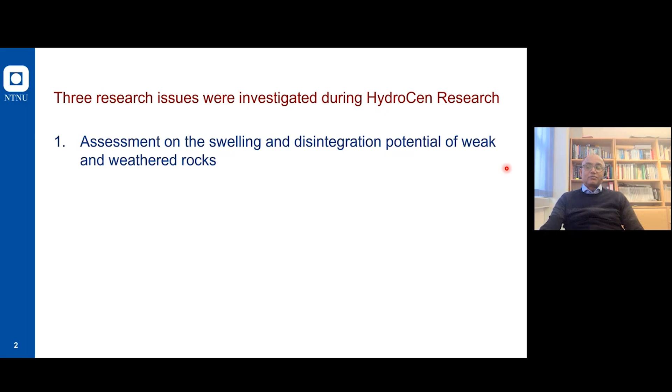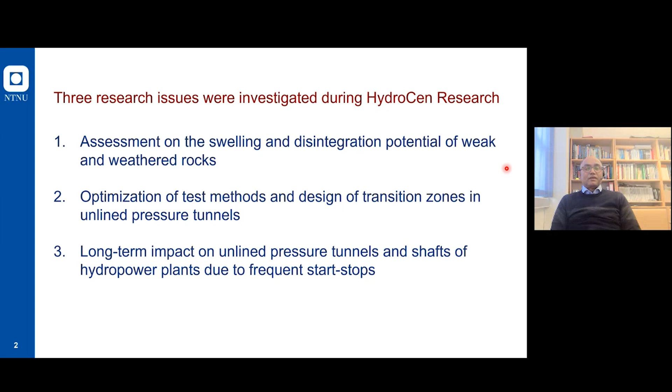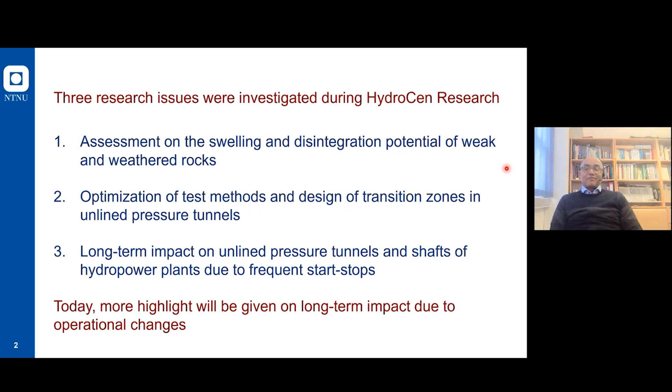The second one was optimization of test methods and design of transition zones in unlined pressure tunnels. And the third one was the long-term impact on unlined pressure tunnels and shafts of hydropower plants due to frequent start-stop. So this is the issue that I'm going to discuss today. The other 2 issues can be discussed sometime later, maybe in future.

So first I will discuss the background on why operational changes happened in Norway. Until 1991, we had almost constant operational scenarios in Norwegian hydropower plants because there were annual agreements with local communities and industry on how much energy they need all the time. That was a fixed operational system, so there were not that many start-stop sequences in a year period. There were very few.

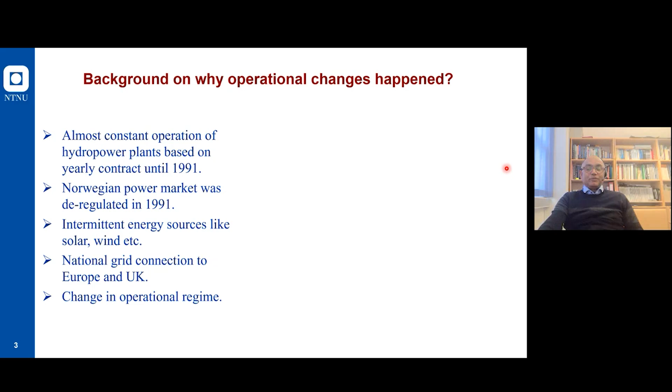In 1991, Norway decided to deregulate its power market, and that led to changes in the operational scenario. In the meantime, after 2000, intermittent energy sources like solar and wind have especially been expanded. And also the Norwegian national grid connection to Europe and the UK has now been made. So that makes a change in the operational regime.

If we look at this pie diagram, we can see the different types of energy systems that are applicable in the European market. Hydropower covers almost 11%. This scenario is predicted for 2050 by Statkraft. So it means there will be a huge change in the energy market in Europe.

So the main battery system to balance this market is most likely hydropower, because it has the potential to store water in the reservoir as a battery, and then it can be used when the price and demand are high. In that context, Norway, a country that has almost 50% of the reservoir capacity of Europe, has quite a lot of impacts on it.

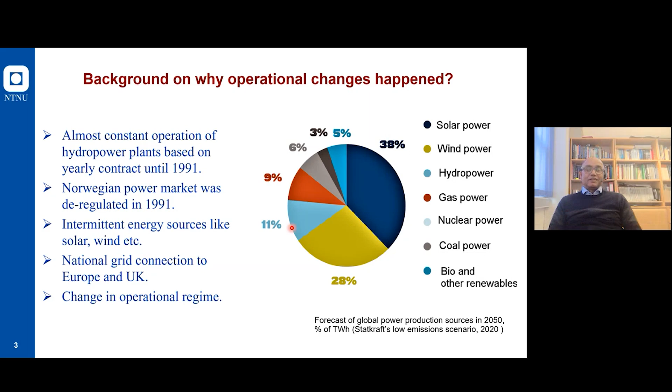As a result, we have collected from some 10 different hydropower plants how the operational regime is right now. You can see here every year we have start-stop or operational change scenarios of up to almost 850 maximum, and minimum up to 100 times. So this is very dramatic, and this will increase more and more.

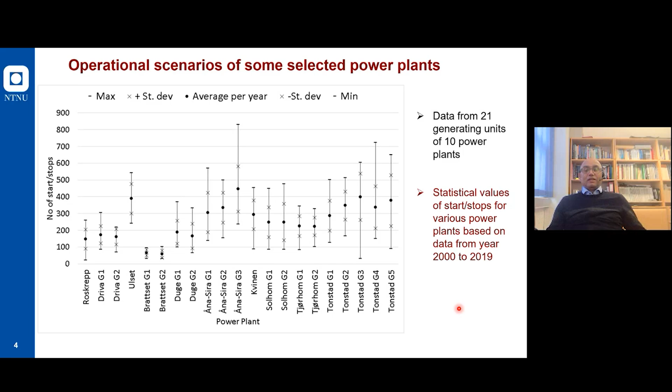These changes will have impact not only along the waterway system itself and on the turbine and generator, but also on the tunnel wall, on the rock mass outside the tunnel. How it happens, I will show you.

If we look at an operational situation of start-stop, for example, we have an off situation, an on situation, and again an off situation, and we may also have load changes. So we start the plant, come to the maximum operational point, then reduce slightly, again reduce slightly, and then do the stop. This is the typical scenario nowadays in Norwegian hydropower plants.

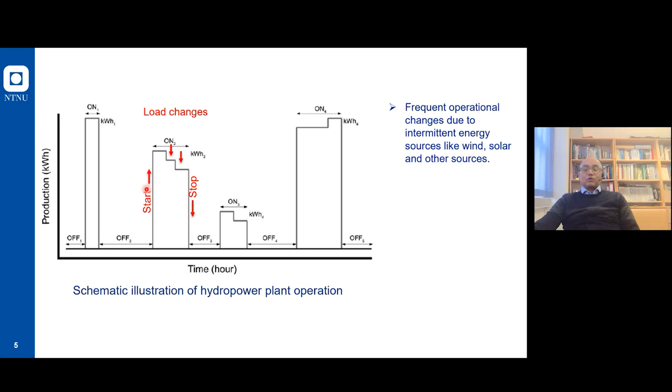These operational changes vary from 20 to over 800 times a year, with a typical mean of about 350 times per year based on this study of 10 hydropower plants. But there are many other plants that are operated even more dramatically. This causes variation in pore water pressure in the rock mass, because Norwegian waterway systems are unlined. It means the water has direct contact with the rock wall.

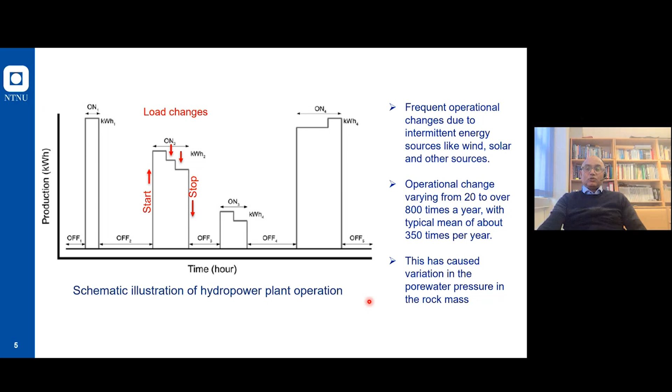In the rock wall or rock mass, there are different joint systems from where water penetrates into the rock mass, so that will change the pressure balance between the water in the tunnel and in the rock mass. To study that, we have made instrumentation. For example, I'll show the damage that may take place due to these changes.

So these are the main scenarios that are happening in tunnels. And of course, many of these tunnels are not stopped. Still, they can be operated, but there will be some more hydraulic loss, and then over time the accumulation will increase more and more. So this needs to be somehow balanced. What to do and how to operate our hydropower plants is very important to make a strategy for.

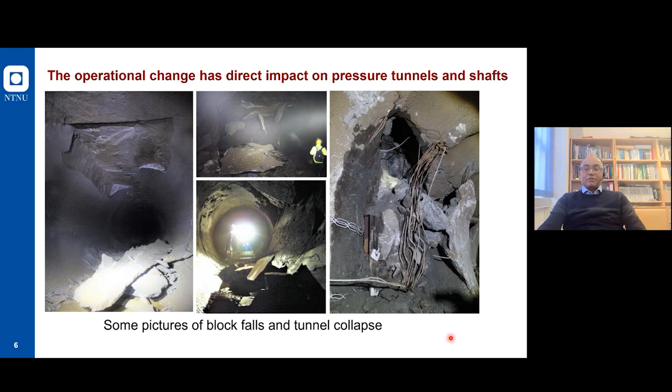So why it happens is that we have a design principle of the tunnel systems or underground plants for hydropower that is governed by 3 main criteria. That is, the vertical height from the exposed rock to the position of the tunnel, somewhere here, should always be more than water pressure divided by the density of rock multiplied by cos alpha, which is the inclination of this tunnel or shaft.

And another criterion is that the shortest distance from the topography to the tunnel should be more than water pressure divided by the cos angle of inclination of this valley and the density of rock. And the third criterion is that the minor principal stress in the rock mass must always be more than water pressure. So most of our hydropower plants fulfill these criteria.

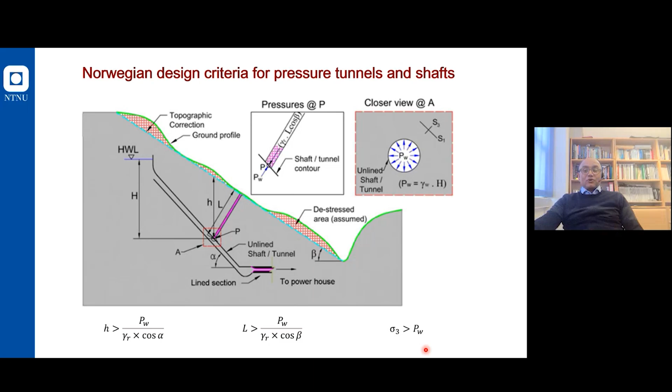But these criteria are to ascertain that the water is not leaking out of the tunnel, but when it comes to the failure inside the tunnel, then this is a different story. So therefore, why these things are happening is very important to study, of course. And that was the main interest for the hydropower industry, and then they asked us to do this research.

And if we look at this design concept using 3 criteria, then there has been the use of a safety factor of 1.3 during the normal period, and if there is an upsurge condition, it may go down to 1.1. But as you see, this is a tunnel which is pressurized with water. And then there are joints in different directions in the rock mass, and water flows through these joints.

And then the normal stress perpendicular to this joint must be more than the water pressure. That will of course hinder leakage far away, but near the tunnel the water pressure is still fluctuating, water penetrates here, and these joints will change due to operational variation. For example, if we have a sudden stop of the tunnel, then there will be a water hammer along the tunnel wall, and that will also affect the rock mass and penetrate into the rock mass.

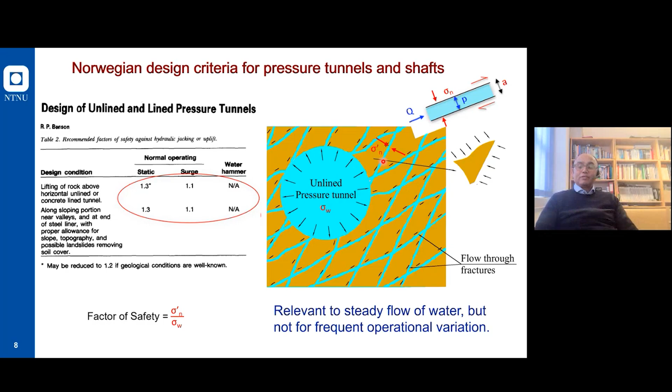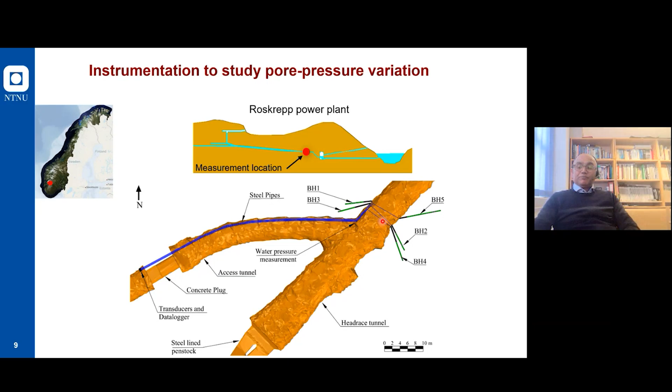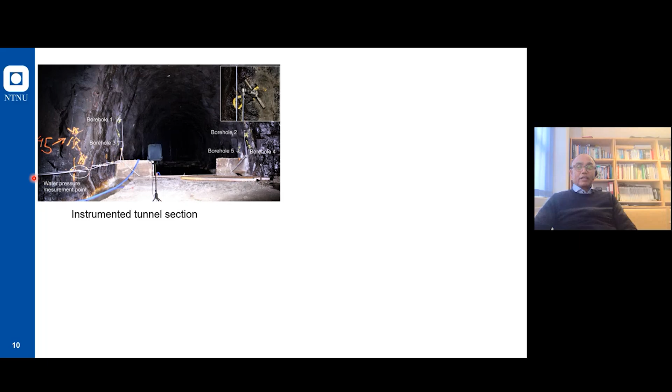So we did pore pressure variation measurement in these 5 different holes and in the tunnel itself, to see how it impacts the tunnel and how the rock mass and the tunnel interact with each other. So to do that, we made instrumentation here. You see there are some pipes coming from both walls out to the tunnel. And then there are these plugs. Through the plug, the pipes are taken down, sensors are kept here, and pressure is monitored in this box, which is a data logger.

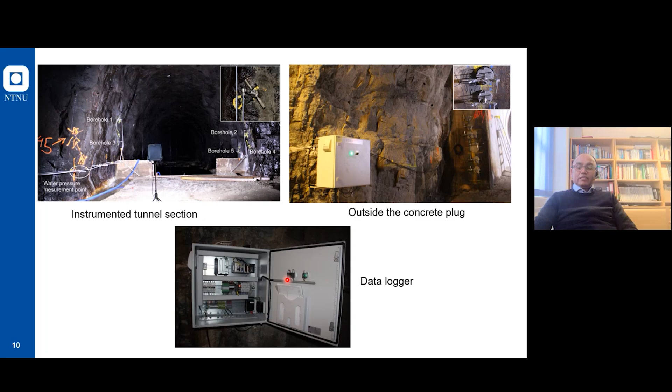It logs at least one data point every 10 seconds. There are millions of data points available from this Roskrepp power plant. Studying this data, we have found very interesting results. But before I go to that, let's look at this situation. For example, here there is constant water flowing in the power plant with a steady flow, and suddenly when we make a stop, there will be a water hammer, and then the water hammer calms down and converts to long-term oscillation, right?

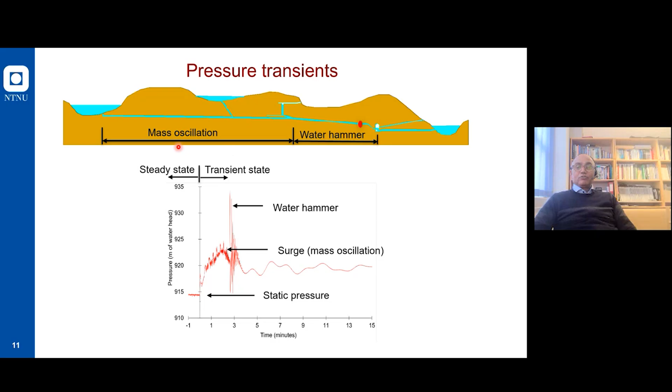So this dramatic increase in pressure and then long-term oscillation will have a huge impact on the rock mass. It means the oscillation goes from the surge tank upward, and the water hammer is effective in this area if the surge tank functions very well. But that water hammer is also converted to mass oscillation after it ceases.

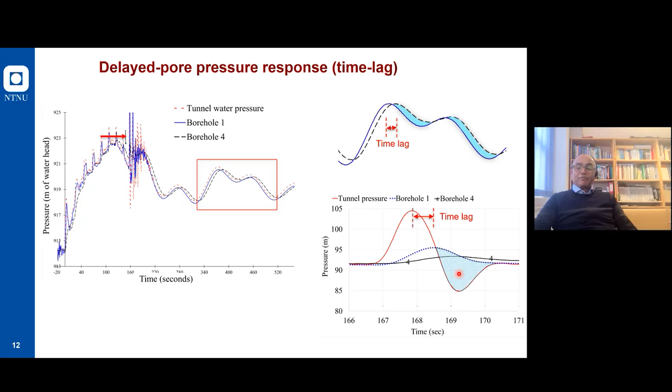So then there is an accumulation of additional stress here. That stress, even though it is on a very small scale, not in megapascal, it's in kilopascal, millions or billions of times of these changes will have an impact on the rock mass. And also this water hammer is even more dramatic because it will also cause a huge pressure change in the rock mass. So that will create a kind of hydraulic stress. This hydraulic stress, which we give the terminology hydraulic impact, will have an impact on our tunnel, pressure tunnel and shaft systems.

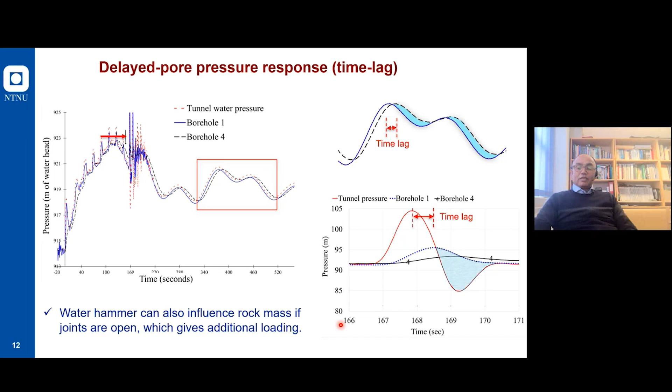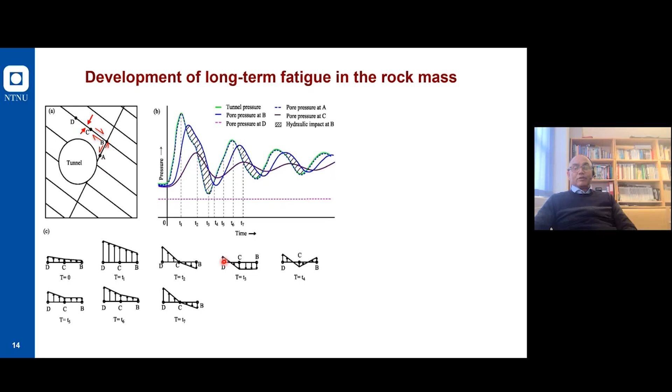For example, when we are at the beginning phase of start or stop of the tunnel, the pressure distribution will be like this, almost similar in all points. And once we are at time t1, the pressure will be increased in D and slightly less in B. And if we reach time 2, then there will be negative pressure in one area and positive pressure in another area. And if we go to time 3, then even more negative pressure here. So in that way, there will be an imbalance in the pressure development.

So the pressure transients will lead to long-term fatigue, because the same rock block will experience different scenarios over time. So that leads to the development of new cracks somewhere here, which is the fatigue crack. So that needs to be investigated in even more detail.

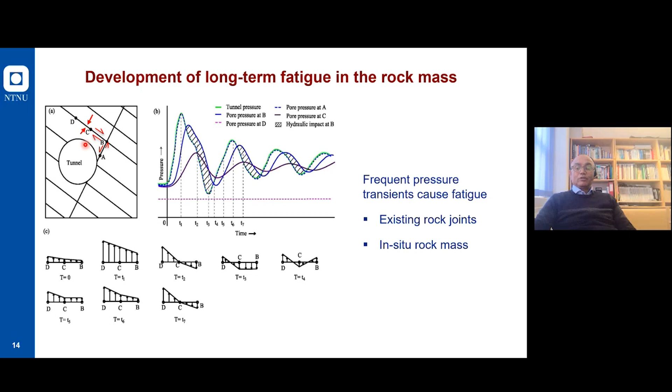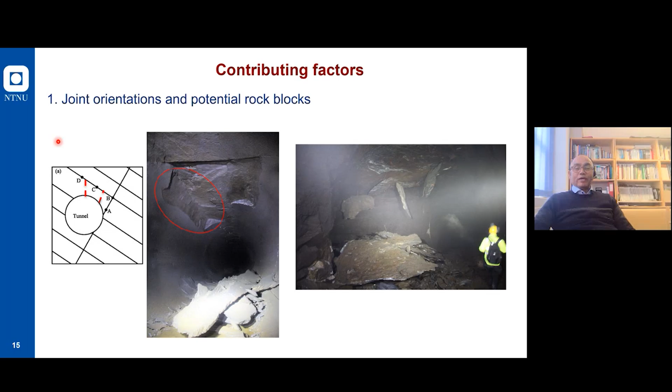So another contributing factor is the deformational response of the rock mass. For example, hard rocks like granite, quartzite, granitic gneiss, and many other hard rocks are much stiffer, and the joints need much higher fatigue limits. They have higher fatigue limits, meaning it takes a little more time for the block fall to occur.

However, if we have rocks that are more deformable in nature, or a weak rock mass, then the stiffness of these rocks is less, meaning the E modulus is much less. So then they are unable to tolerate a larger number of pressure transients.

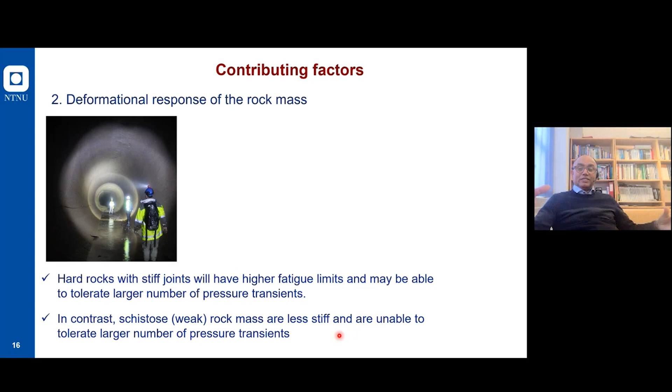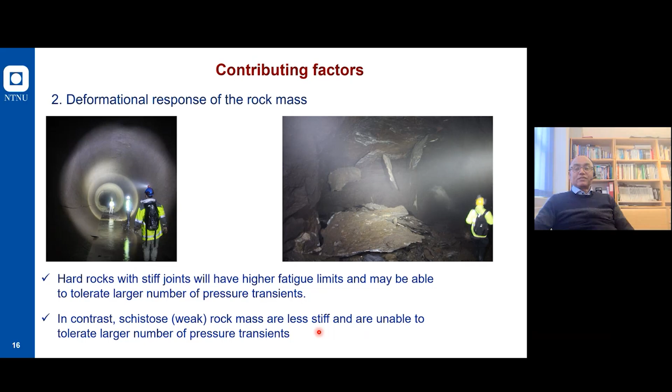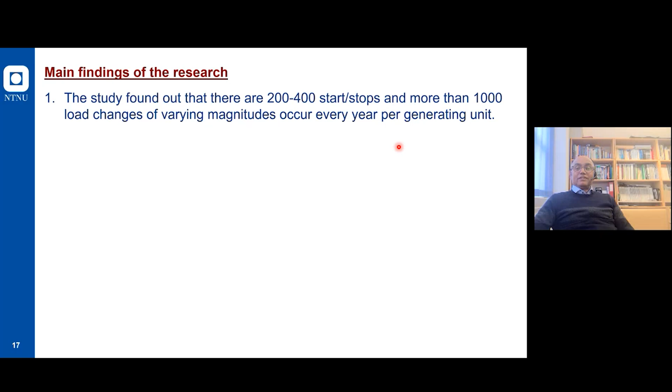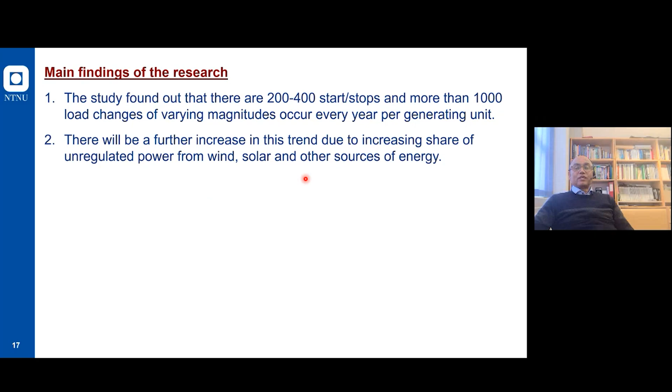So the main finding of this research is that 200 to 400 start-stops and more than 1,000 load changes of varying magnitude occur every year per generating unit of the hydropower plant. There will be a further increase in this trend due to the increasing share of unregulated power from wind, solar, and other sources from Europe and from within the country.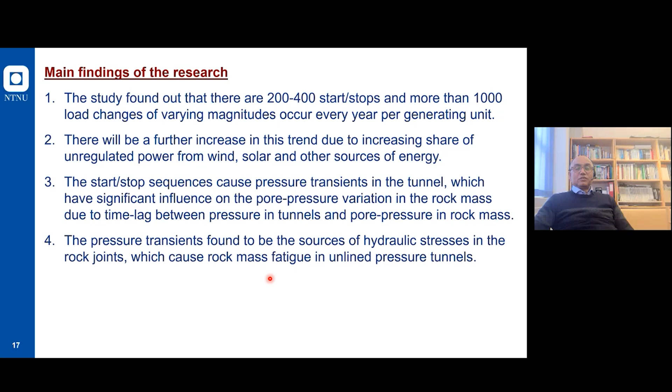The start-stop sequence causes pressure transients in the tunnel, which have significant influence on the pore pressure variation in the rock mass due to the time lag between pressure in the tunnels and pore pressure in the rock mass. This change needs to be taken care of. The pressure transients were found to be the source of hydraulic stresses in the rock joints, which cause rock mass fatigue in unlined pressure tunnels and shafts.

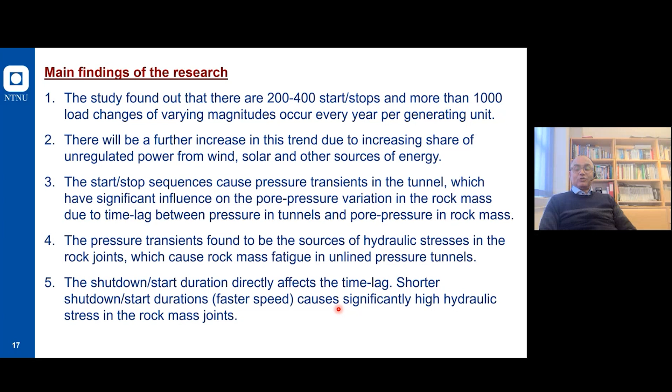The shutdown and start duration directly affects the time lag. Shorter shutdown and start duration, faster speed, causes significant hydraulic stress in the rock mass. So if we shut down a little more slowly, the same tunnel will be safe much longer, meaning the lifetime of the tunnels will be increased substantially. This is an important issue that hydropower operators should take care of.

So during this research period, we have two issues. There are many issues, of course, but the grant given to us is on these two. One is research program 1.1, new hydropower plants design and construction. The title is development and documentation of new design methods for evaluation of rock stress for hydropower tunnels and underground powerhouses. This PhD research will start from August, the position has been opened, and we are in the process of recruiting the new fellow.

Another research item is within 2.2, sustainable upgrading and expansion of the hydropower systems. The tentative research title is Study on Rock Mass Fatigue and its Impact on the Lifetime of Pressure Tunnels of Hydropower Plants. This is a continuation of the presentation that I have given right now, and the issue that needs to be looked at in the design criteria that I presented earlier.

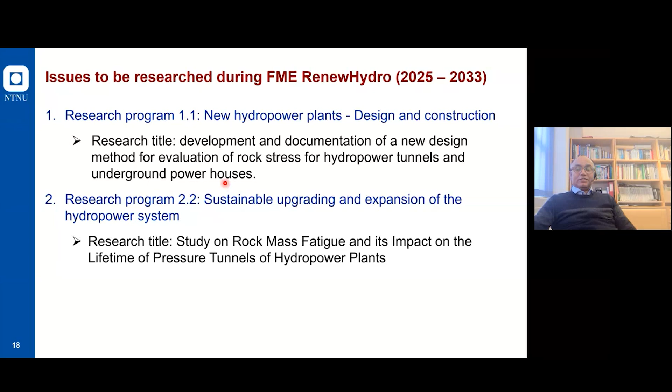Because even though we fulfill all three criteria, there have been some failure cases in hydropower plants. There has been hydraulic fracturing or hydraulic jacking, and water leaked out of the tunnel. These need to be prevented. So we will make some design changes, principles, for both waterway systems and underground powerhouse caverns. These are the two issues we will be discussing.

This presentation is based on our work during the HydroCen period. We had a PhD fellow, Bibek Neupane, who was very active in doing this research, and myself and Kaspar Vereide supervised him.